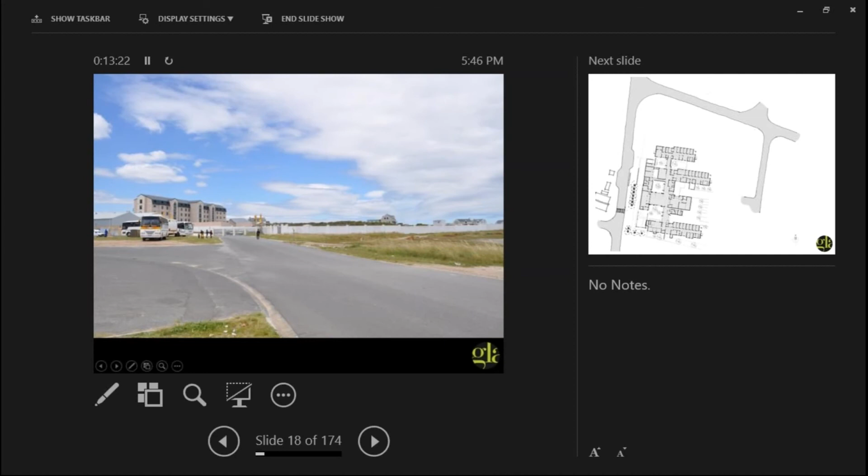The center is organized... Are you battling there? Sorry, Tina, do we need a break? Sorry about that, I think continue, then we'll sort that out. Okay, the site is located. Sorry, where am I now?

The centre is organized around a number of courtyards, which become progressively more private and specific. The first and most public interface embraces the existing market to begin to form a civic space. This is strengthened by the main pedestrian entry to the centre and the placement of all administration and staff facilities along Swartdam Road, adding definition to this edge. Tree planting and public seating continue this definition through the public square.

The provision of a new drop-off and pick-up embayment on both sides of the road and the possibility of extended trading will help to increase activity and life of the space, which together with the extended roof of the administration building also functions as the pre-waiting area to the centre.

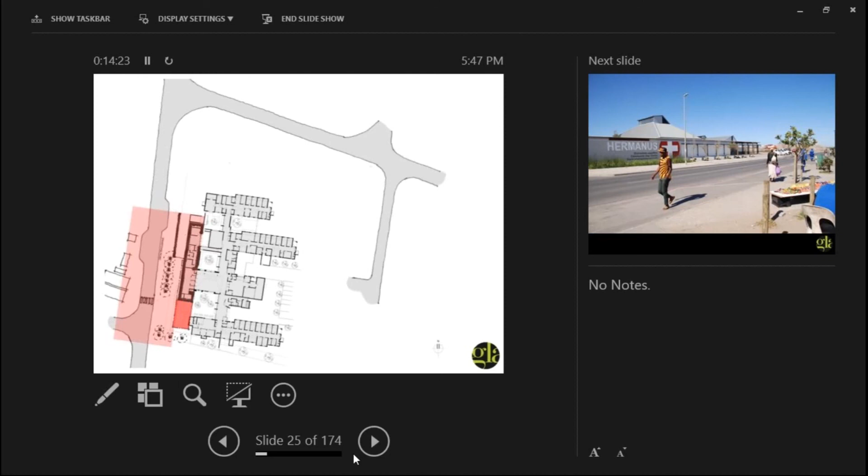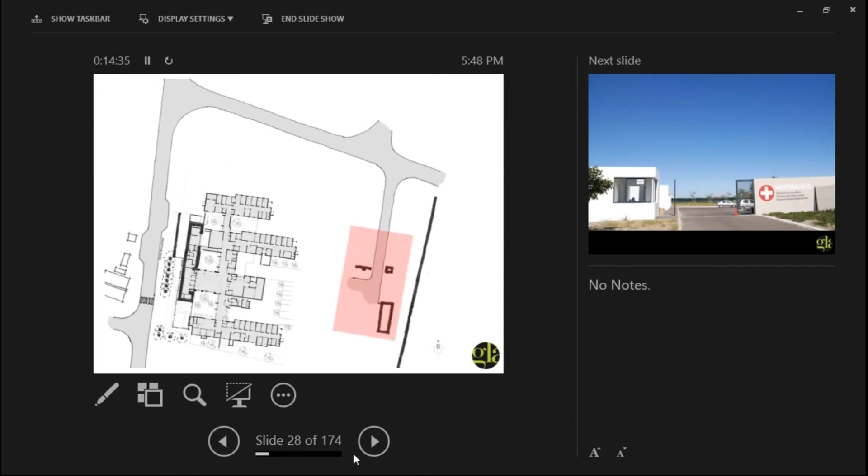Vehicular access with associated security and garaging for government vehicles are pushed towards the eastern boundary to leave the centre of the site for the development of the clinical wings, pharmacy, parking, and potential future expansion. The pharmacy shares the main waiting area with record and reception. The three clinical wings are orientated...

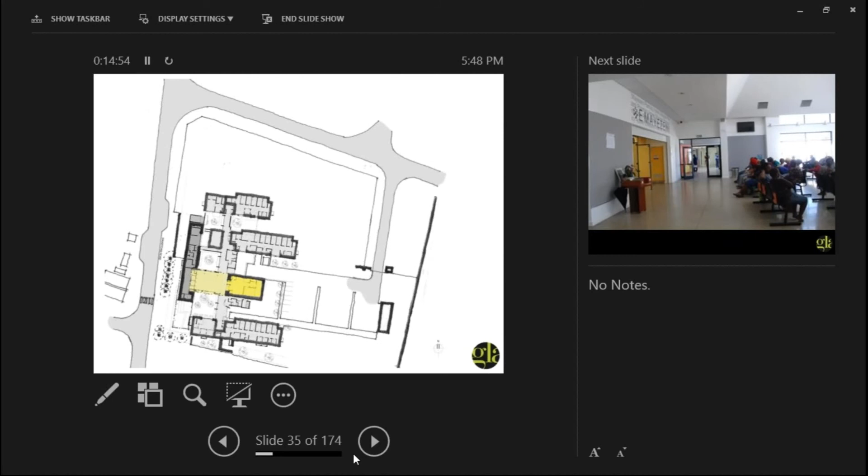The guys online are seeing the split view of the presented screen. That's not a problem, I can just see two slides at the top, so not to worry.

Right, the three clinical wings are oriented. Are you on the next one, Tina? Use the down... okay. I'll wait for you, nothing to come more.

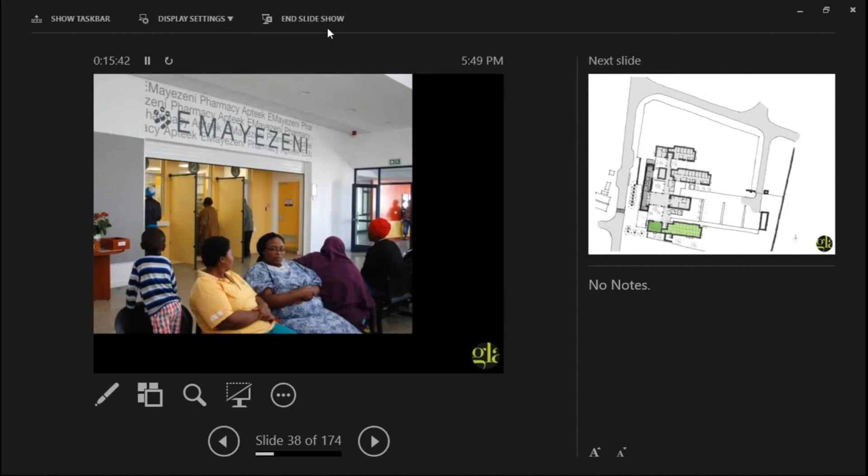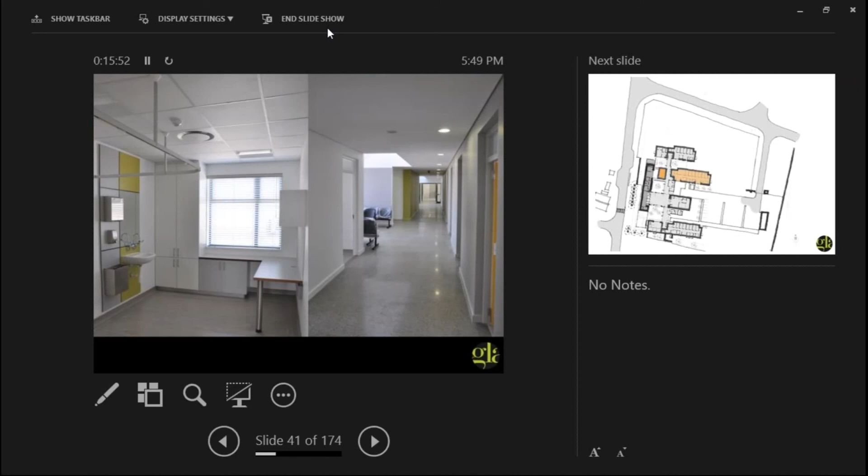To the south, oral health care and the infectious diseases unit, which both have to be accessible from the entry lobby for patients with pre-booked appointments and for patients receiving daily treatment. Both these units house their own reception and patient records. Acute and chronic care is close to the main waiting area with mother and child services and physical rehabilitation in the quieter northern wing.

Those are the two at the northernmost end.

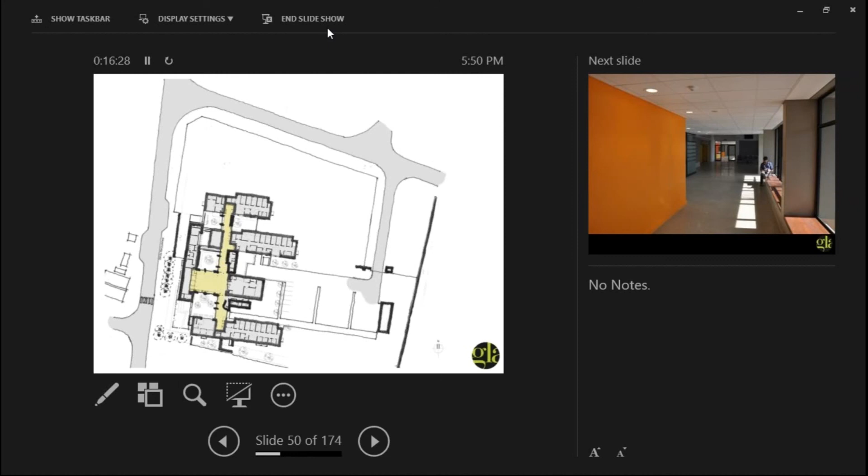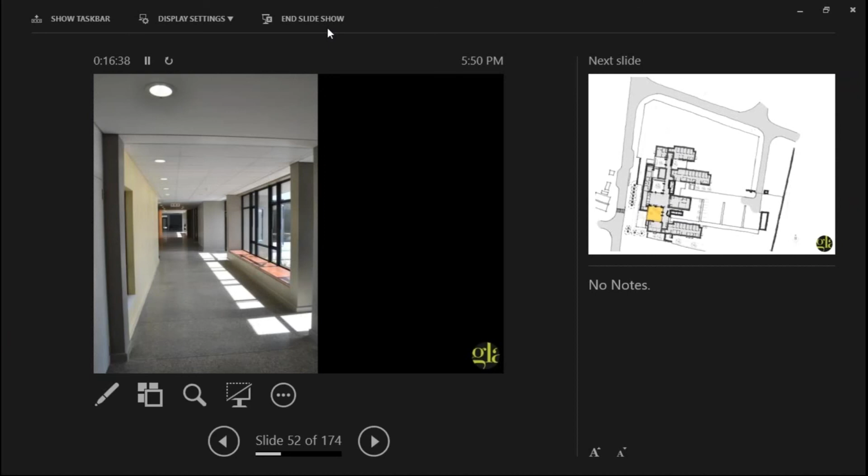The splitting of these buildings into two functional units each allows the main circulation spine to be positioned away from the administration staff facilities, forming four courtyards, each with its own specific character and function.

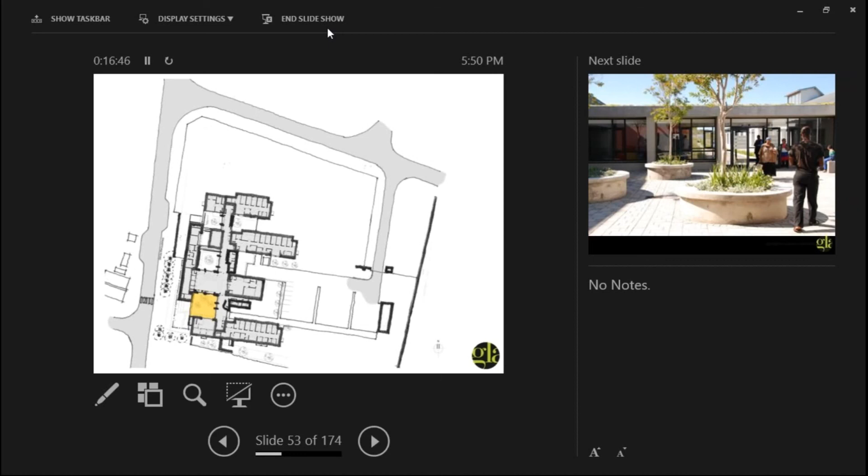The first is the main entry courtyard, a transition between the public square and entry into the building. Like the other three, it is protected from the prevailing southeastern and northwestern winds and offer options of sunny seating areas or shaded areas against the building or under trees.

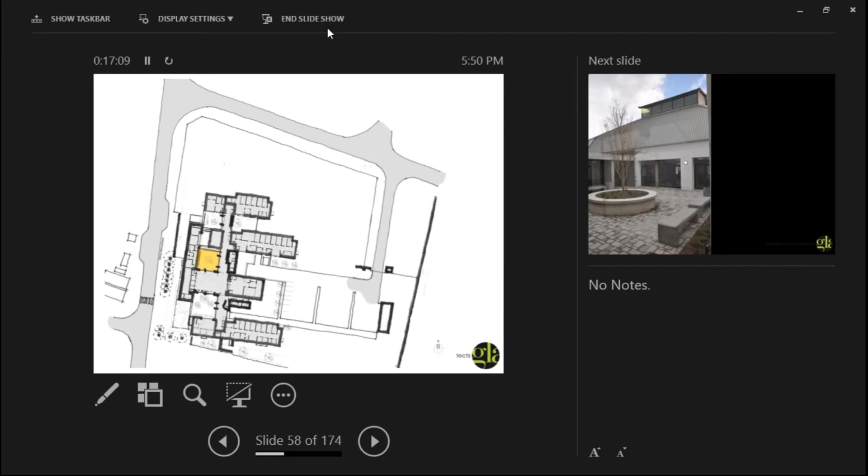The second courtyard is an extension of the main waiting area and the central spine, offering reprieve during busy and noisy times of the day.

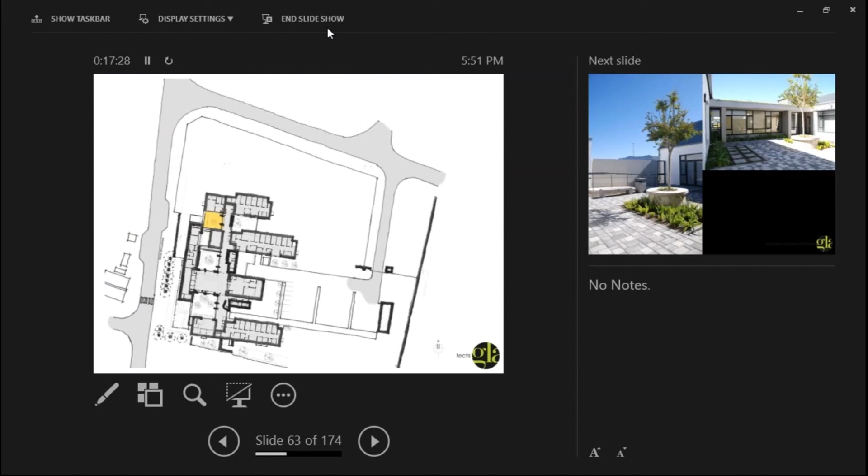The third courtyard is dedicated to the staff and accessible only from the staff tea room and meeting room. And the fourth courtyard is partly dedicated to the physical rehabilitation unit, with a number of obstacles to be negotiated during therapy sessions. It is also accessible from the central spine as a reprieve.

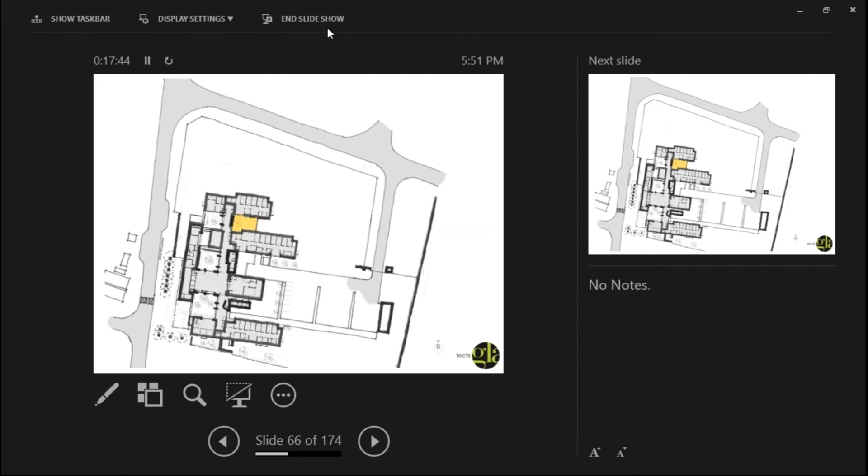Two further outside spaces: one is an outside waiting area for the infectious diseases unit, and a play area for children are developed close to these clinical units.

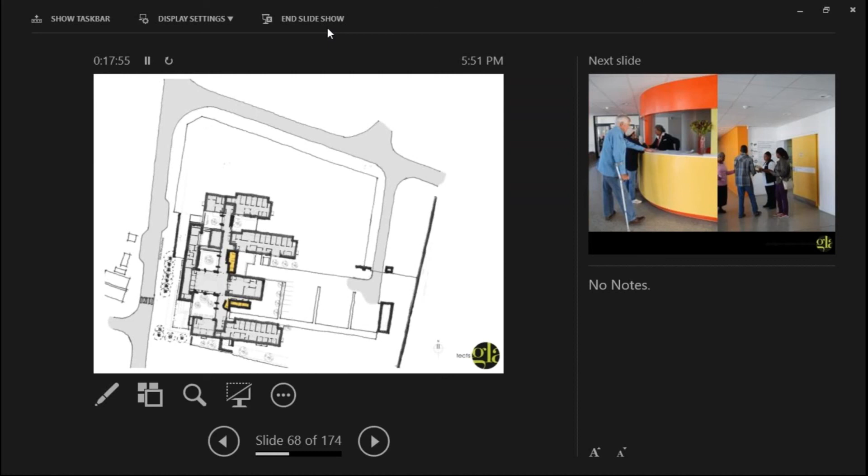The central spine, which also accommodates the generic functions of the help desk, the public facilities, and the main clinical preparation area, runs along the edge of these courtyards and can be interpreted as an extension of both the main waiting area and the outside courtyards, with windowsill seating below large shop fronts and planted roofs over the courtyard edge.

The natural light from the courtyards and the articulation of the inner wall of the spine assist in orientating oneself within the building. It increases legibility and a clear progression from the public entrance to the more specific and private functions of the clinical departments.

This is further extended into the clinical areas with the pools of natural light from the roof monitors announcing sub-waiting areas, each with visual links to outside landscaped areas.

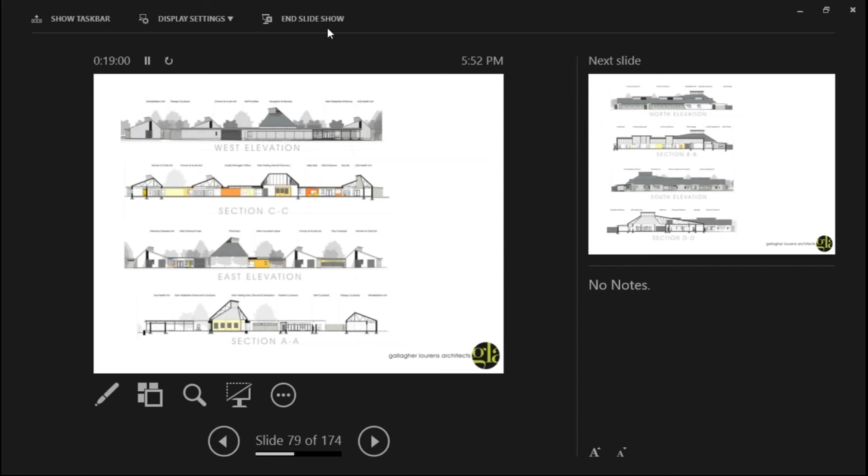The Mamre Community Day Center is a primary healthcare facility, and as such deals with the well-being of people in their daily lives. It does represent our intention to design a building which is easy to relate to, warm and welcoming, and providing indoor and outdoor spaces with comfortable proportions.

As such, the material choices, form, and scale of the building is less civic and relates more to a domestic architecture with abstract references to the vernacular. The rectilinear buildings are made of bagged and plastered brick load-bearing walls with double-pitched and hipped roofs and well-proportioned openings. The walls are stepped or thickened in places, sometimes to allow seating, to visually extend openings, or to receive intersecting elements. The roofs are manipulated to reflect a hierarchy of spaces and functions, and the often encountered dormers are reflected in the roof monitors.

Openings on the northern edges of the buildings are well protected with overhangs to eliminate direct sun in summer, but to allow winter sun to penetrate deep into the building.

The building is just less than 2,500 square meters large and occupies about 50% of the site, and the hard landscaping, including the parking area, about another 1,000 square meters. This left 1,500 square meters for soft landscaping.

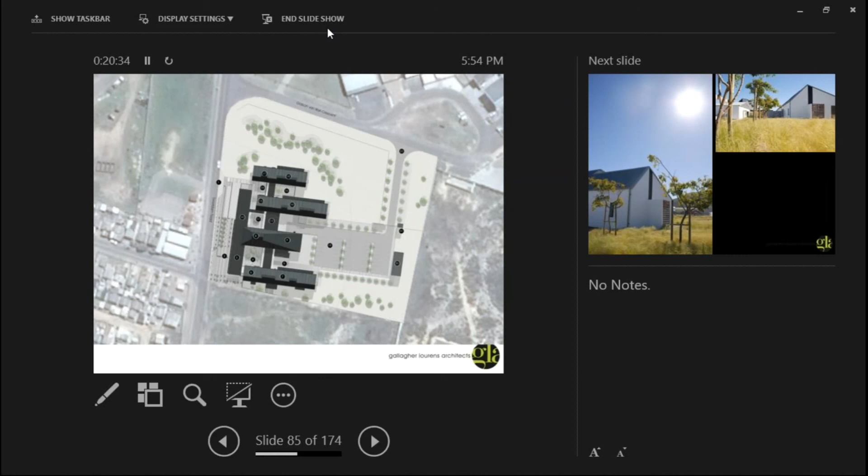The intention was to use a palette of indigenous planting materials with ordered planting along Swadam Road and controlled planting in areas of close contact. The remainder of the site is hydro-seeded with a seed mix of coastal fynbos and pioneer plants with some specific species interplanted. These will hopefully establish within the next season.

The natural wetland area to the north of the site was strengthened with some shaping and the seed mix and interplanting adapted to this particular microclimate. In closing, although humble and unpretentious, the building graciously addresses its neighbors and users and subtly reflects the landscape.

Thank you. So I'll just move straight on to this. Yes, I think let's get it.

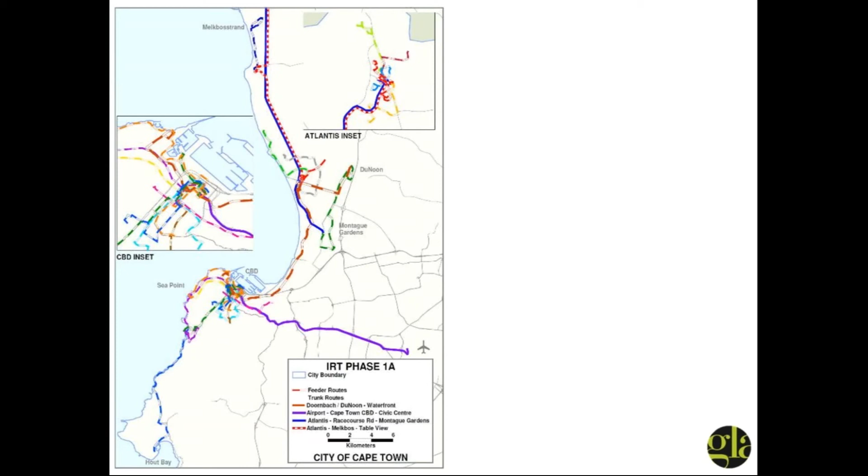The three bus depots which we will discuss today form part of the first phase of the City of Cape Town's integrated rapid transit system, now known as the MyCiTi project. Phase 1A was the pilot project for the rollout of an integrated public transport system throughout the metropole and concentrated on Tableview, Atlantis, Dunoon, the inner city, which includes Hout Bay, the airport link, and the connecting trunk routes. This project was also the first comprehensive project of its kind in the country to be fully implemented.

Natalie, I hope I'm not telling lies.

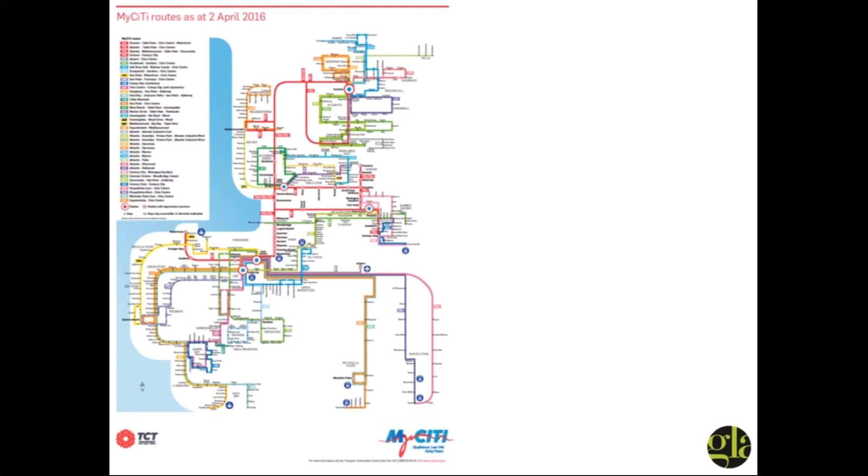For this reason, very little local precedent was available to draw from, and the city, with its lead consultants, undertook extensive research in similar systems in South America especially. Although the brief for the depots was based largely on this research, the information was not specific and dependent on the modeling of the system to determine the numbers of buses and the number of and desirable positions for the depots. We were, however, put in contact with Victor Cordoba, a manager of one of the depots in Bogota, Colombia, who was a valuable source of detailed information, formulas for calculating the type and extent of facilities based on number of buses and frequency of service.

So to a large extent, the brief for these facilities was developed whilst modeling exercises were ongoing, determining types and numbers of buses. The brief was interesting because it included a number of typologies, each with its own demands, all thrown together on one site. Many of these attract quite stringent technical and safety requirements.

Amongst these were the bus approach to the depots, security checkpoints for buses and personnel, refueling, bus cleaning, both the chassis and the body and internally, staging or parking of buses, maintenance of buses, which included tire repairs, wheel balance and alignment, brake testing, mechanical repairs, body repairs, painting and touch-ups. Drivers' facilities and bus dispatch, and training facilities including mock-up station platforms. And then, of course, the administration thereof.

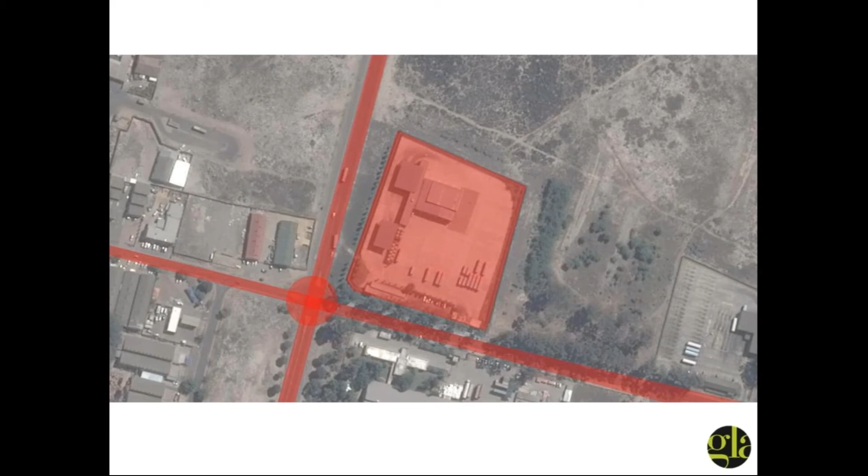The inner city depot is a part conversion of an existing long-distance bus depot with new facilities added, on a restricted site with restricted vehicle access and some historical content which required an archaeological watching brief. It occupies the street block between Prestwich Street, the Helen Suzman Drive Elevated Freeway, Napier Street, and Bennett Street to the north. The site contained a number of scattered and badly maintained buildings. Only 2 buildings were worth retaining.

It is located in a sought-after commercial part of town, with 3 to 4 story buildings along most of the opposite street edges. To the southeast is the Prestwich Primary School, with the school gates facing the depot and where kids arrive and leave on foot or by public transport. During school term, large groups of kids wait on both sides of the road in the afternoon.

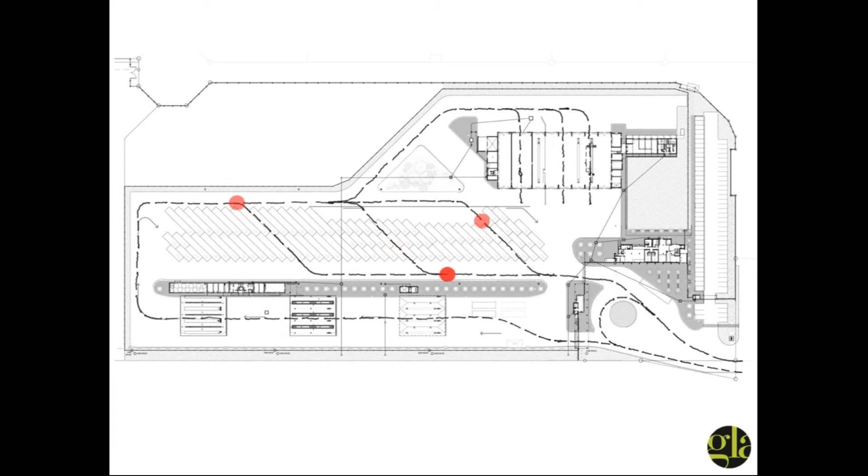The organization of the functions on the site was largely dictated by the movement of the buses. Since we drive on the left side of the road, the movement needs to be in a clockwise direction to eliminate a crossover at the entrance-exit points. Some functions are constant for every bus arriving at the depot, and the others happen at planned intervals.

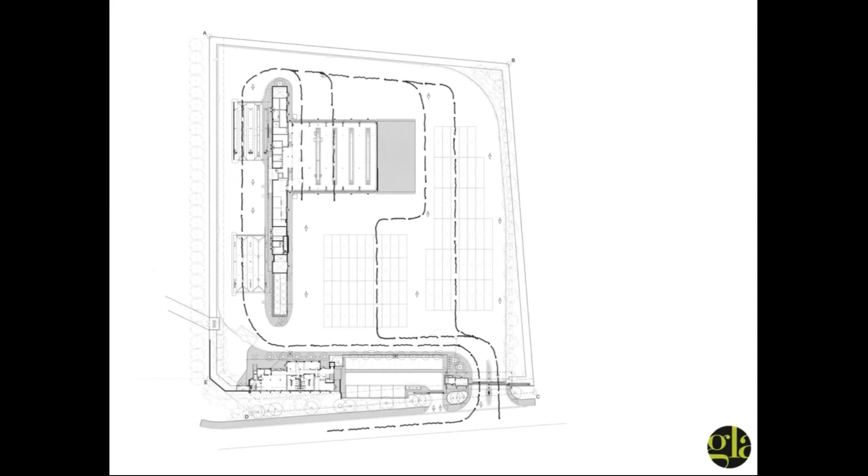The administration buildings were not strictly tied to the circulation, although in the case of Stables and Atlantis, it also accommodates the driver's facilities and the dispatch office, also referred to as operations. These buildings do, however, form the interface with the public or street and offer the only pedestrian and staff access to the facility. The exception here again is the inner city depot, where the separation of administration and operations made it possible to also separate the staff entrance from the administration building.

We were able to use the administration building together with the entrance security building at Stables Depot to form the entrance court. This court extends the queuing distance for buses arriving during peak hours, accommodates a turnaround point for buses at the end of the route, and acts as a public interface for the depot. At the Atlantis Depot, these 2 buildings are placed along the boundary of Christopher Stark Road to strengthen this edge.

At the inner city depot, the administration building sits along the more dominant Prestwich Street, providing a much needed definition to the corner closest to the existing developments in the street. Due to the narrow streets around the site and the difficulty of maneuvering and queuing buses in these busy streets, together with a resultant danger to pedestrians, a new access to the site had to be found. The road reserve under the Helen Suzman Elevated Freeway provided the opportunity to link the depot directly into the city via the Buitengracht-Hans Strijdom Boulevard intersection.

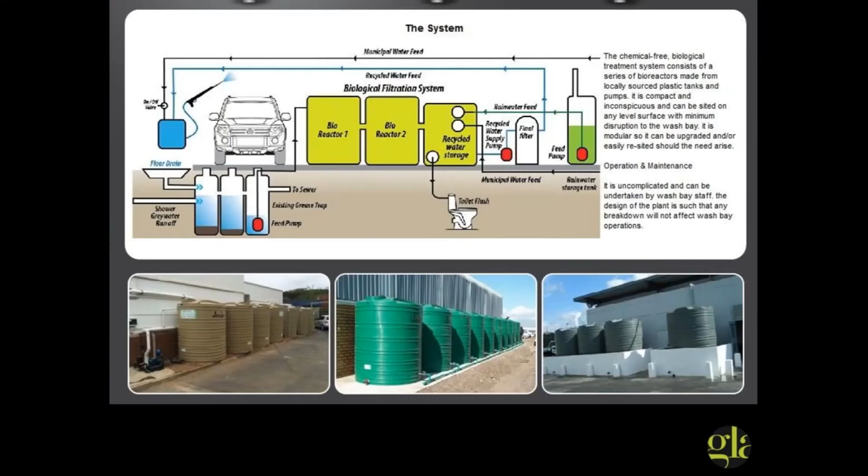Okay, this is still leading on to this whole discussion about materiality and the makeup of the context in Greenpoint and how that might have influenced it, with office buildings and with semi-industrial buildings and shed-like buildings. I think the nature of the projects are in fact exactly that. They are kind of industrial buildings. They're not heavy industrial buildings. You can call them light industrial buildings. They're partly commercial. So that was what the grain of Greenpoint to a certain extent still is, or parts of Greenpoint.

I don't think it influenced us in the way in which we broke up the buildings. But where it certainly did play a role, I think, or I suspect, is in the materiality of the buildings. In the inner city site, we made a conscious effort to deal with the roofs a bit differently in some areas than what we did elsewhere, where we felt it necessary to do so. But where we felt that what was designed elsewhere could sit comfortably on that site, that's the way we went.

I must also tell you that the inner city depot was a far more complex one than the other two. Partly because it sits on an existing built-up site with existing buildings that we partly had to retain, but also because during the whole process it was broken up into virtually three phases. The 2010 phase, which only dealt with a very tiny portion of the site, where we started working, and that was more or less a lick of paint in places and a little bit of fixing up here and there.

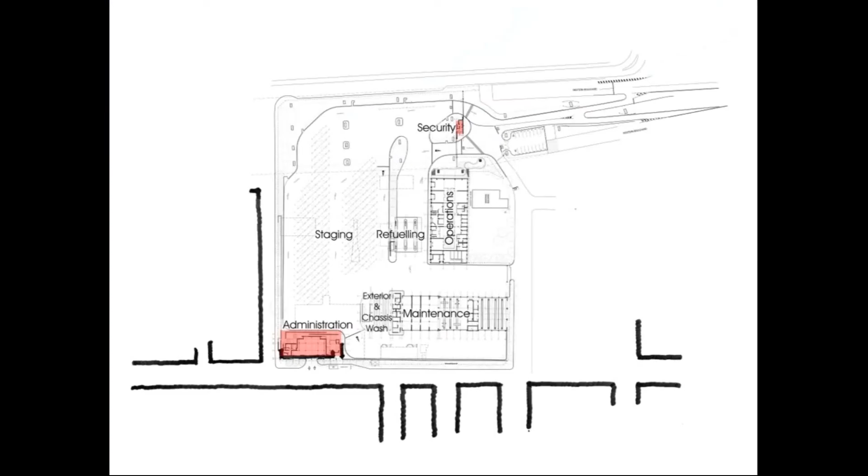Yes? How have the buildings been received by the communities around them? And I know from the operator side there were security concerns, especially with the position in an informal settlement. How's it going? All right, Carmen, you wanted to know how these buildings have been received by the respective communities. Knowing that in the beginning there was a bit of resistance, but it's now a few years down the line, so what has happened?

I think they've been received remarkably well. We just recently went on a round of inspections to all three of these depots for final completion. And I will start with the best one, which is Atlantis Depot.

The community is incredibly proud of this depot, and we found some staff members working in the depot that tell you the story of how they've watched this thing happening, and they've been wondering what it was, and the moment that it started taking form and they realized what was happening, they made sure that they're going to get a job here because this is a place where they want to work.

So from the community in general, there was great acceptance. From the staff that work at that particular depot, there is huge acceptance. You can go there at any time of the day or night. Everything is spotlessly clean and in working condition. It's well maintained, the hedges are clipped, the plants are maintained, they get new compost every few months, everything is just like it should be.

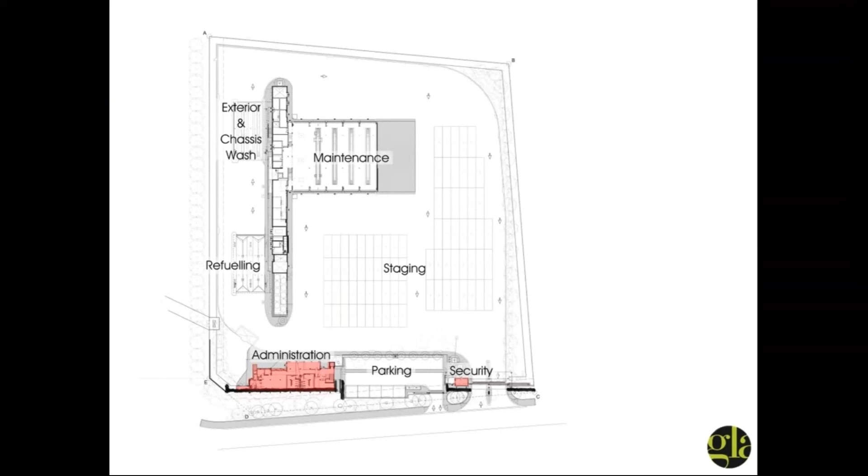The other two depots are generally in a good condition. They are being looked after. But they have their stresses and strains. The inner city depot is a rough place to be in. So especially the refuelling building takes a bit of a knock, but that building also houses all of the staff facilities. So it's difficult to keep an eye on it and to make sure that everything is always clean. So we understand all of that.

The administration building is fine. The security also takes a bit of a knock. And then at stables, everything seems to be okay. It's not perfect. It's not as good as Atlantis, but it is reasonably perfect. There was a concern from the operator side about security. The security fence has now come down, eventually, the hoardings. The building was upgraded to make them feel a little bit more secure.

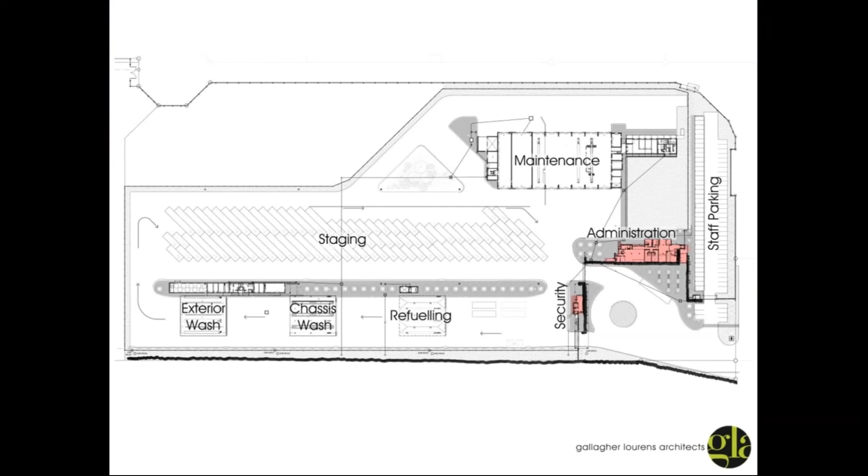And we were worried during the recent unrest in Dunoon that it might become a target. But it seems like that poor last station on the route is the one that takes the beating. It's just around the corner. It's literally, I think, 50 meters from the depot. But that takes a serious beating. But nothing has happened at the depot yet.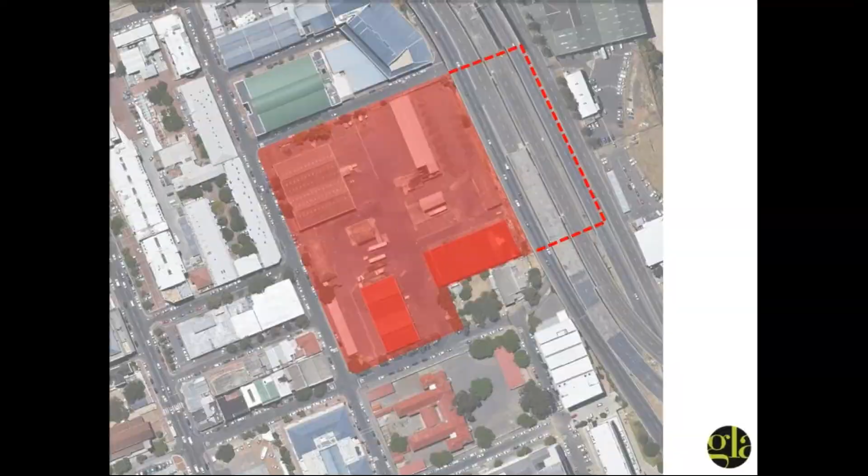And the community use the soccer facilities at the depot quite a lot. So Tina was just saying that the depot allows the kids from the local community to use the recreational area that was made for the drivers whilst they sit between shifts. So it seems like they've got a fairly good relationship with the community.

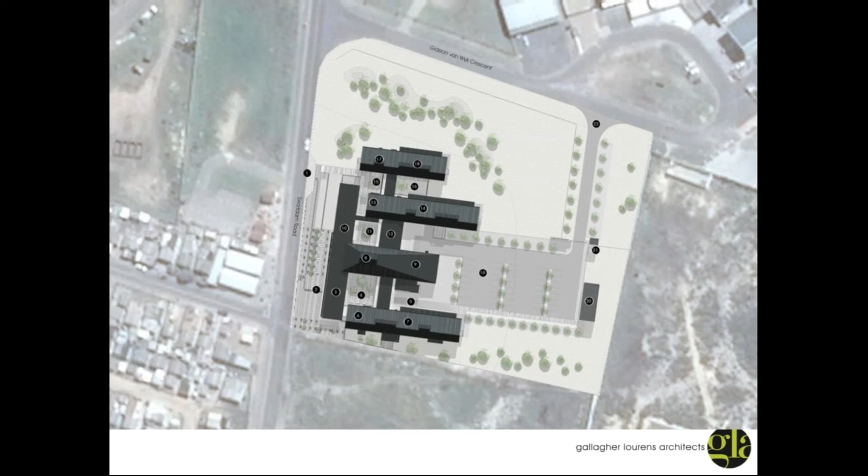Just to go back to the clinic, if you want to add that into the mix as well, because the proof is in the pudding. The proof is in how the community accepts it and how the staff deals with the building. And on a visit to the clinic some time ago, chatting to the sister in charge, I saw people walking in with Pick n Pay bags, and she said to them they can just go and put it in the office. So I made this little silly comment, oh, are you having a party here later?

She says, no, those are just volunteers from the Mount Pleasant community who on occasion bring food, which we store in our storeroom, and when one of the nurses report a patient that doesn't have money for food, then we provide them with food out of that storeroom.

And that's not all. You might have seen in the staff room there were 3 ladies without uniforms. They are from the Zwelihle community, which has a whole organization of women who sent 3 ladies to help clean the clinic every day. It's just to assist the staff of the clinic, because obviously the staff cannot get everywhere. So the clinic is spotlessly clean and organized, and there's flowers, and there are boxes for suggestions and all kinds of things. And the flowers come from the gardens, yeah.

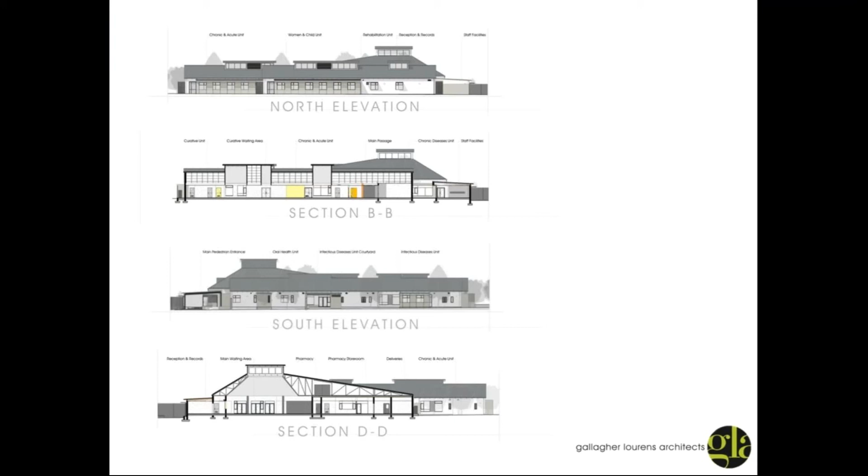And then on top of that, she says, from the traditional Hermanus community, there's also an organization of women who know that the administration of the clinic must be difficult. It was 3 clinics that were thrown together. So this organization sends 2 women on a daily basis to help with the capturing of patient records. They sit in the records room behind a computer and digitize them. So the whole community have come together to support the clinic, because they just love being there. So yeah, I think they've all been reasonably well accepted.

That is an online question as well. We were asked to comment about the roofs of these buildings that seem to have a common theme of a bit of a sculptural quality.

Firstly, thank you for the compliment. Gosh, Tina, how do I answer that question? Look, in the clinic, it was relatively easy to get there. It's always easier to motivate from something that was kind of pushed onto you. We had to have a roof space. We had to have a pitched roof, simply because of stuff that happens inside that roof, which is still not perfectly resolved.

But also, it sits in the Southern Cape, which traditionally has pitched roofs. It provides you with the insulation that you require. People have done it for years, so why would we go and reinvent the wheel? But what we did, however, is both the double pitched roofs and the hip roofs that you find in the area.

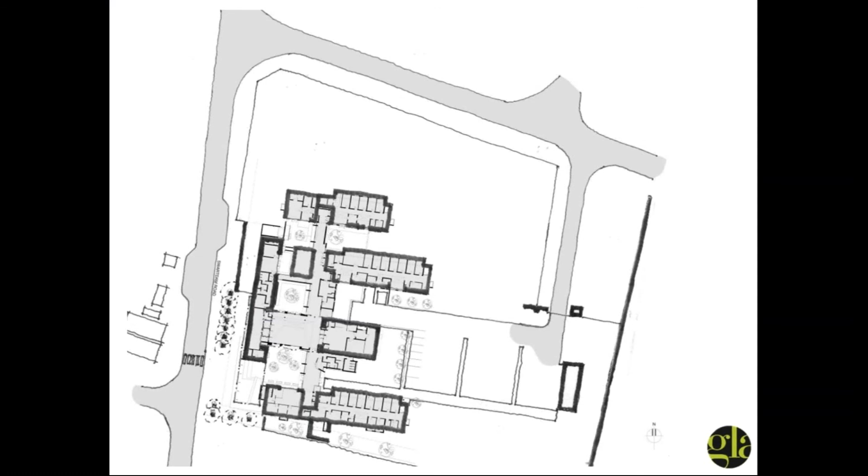There were obviously a couple of items that had to be brought in from Cape Town, but that was a minor portion of the building. I think if you decide to build a building that is reasonably humble and that is to be seen as part of the community, then that just comes naturally. You design it in a way so that the community can be part of it, and that they can relate to it once the thing is completed. With the depots, it was a similar thing, except there's a lot of concrete work, but the contractors used local labor from Atlantis and from Dunoon, and in the inner city depot, perhaps the only one where there was no local labor available, so they had to import their labor from outside the city.

Thanks, Henk. Another question asked by David Hoffman - he doesn't know whether it's intentional or not, but he noticed in the window mullion spacing, he saw Mondrian. That's great, well spotted - typical artist comment.

There was a question related to time frame. Janita and Shal both asked what were the deadlines. Was it tricky? How did you negotiate the project duration from inception to completion?